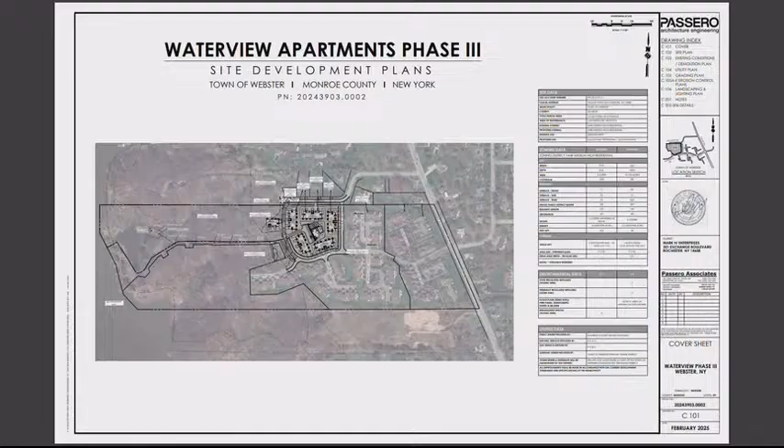You all set? Yep, let's go. Okay. Just get this stuff organized here a little bit.

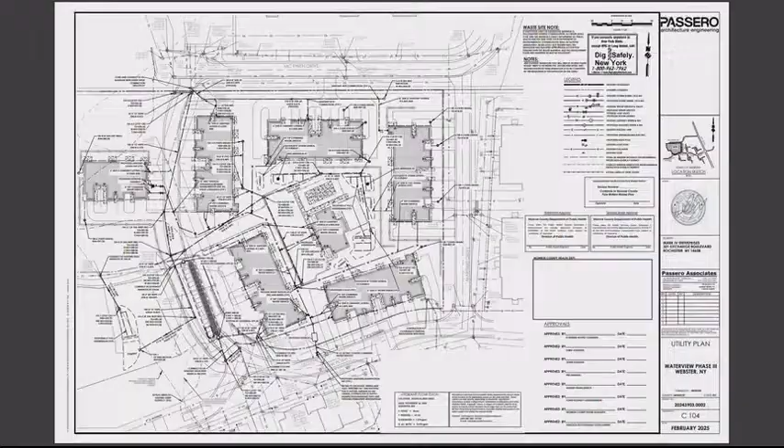I was wondering about the grading on the northwest corner of Building 6, how that transition is happening with all the retaining walls. Can we get clarification on how that's all being tied in on the northwest side? You indicate a retaining wall here, but no additional grading or topo to the northwest of where that retaining wall abuts those contours.

Is there an answer to that? Yeah, they're tying right into existing grade. So whatever the existing grade is, that would be the bottom of the wall elevation. Okay.

I had another comment, if you wouldn't mind evaluating the landscaping plan. It seems you have some prominent tree species that are going to be within your pipe network. Deep roots are going to go right into the drainage structures you've indicated. Just give consideration for long-term success of the drainage structures. In the landscaping plan, there are some larger trees, like PN2 - you have two of them right along the line of your drainage structures. If you wouldn't mind taking a look at that.

This is minuscule, but between building 4 and building 5, you have a garage, so somebody pulling out at night and turning on their lights could potentially shine right into the window of the second story of building 5. If you relocate those trees, keep that in mind to break up the light. You have that scenario in a couple locations, even on the east side between building 4 and 3, and also between building 2 and building 1, where vehicles will be exiting the garage with lights on.

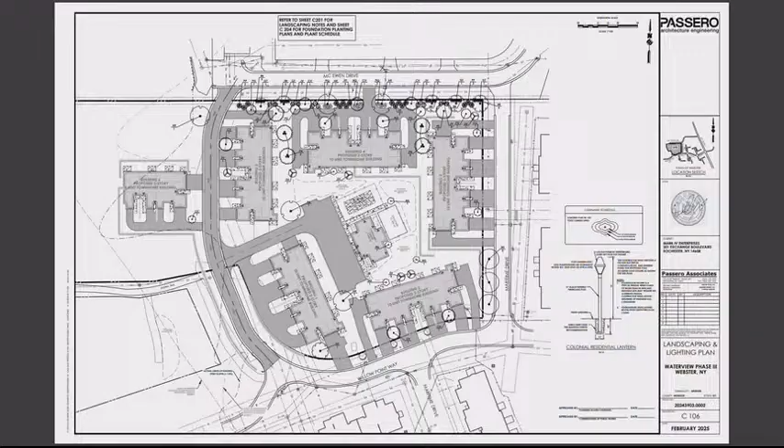One thing to note, you have existing vegetation along Willow Point Way. Is the intention to remove that vegetation or keep the existing trees? All the ones shown are meant to remain. There are, I believe, two that are in the driveway, if you're removing them. If you wouldn't mind indicating how you're going to protect them, because there's some grading occurring there that's more than 6 inches, which could impact them - maybe consider removing them, since it might damage the trees.

There's existing hydrants on Maritime Drive - the silt fence you're proposing is in front of the fire hydrants. If you wouldn't mind moving those behind the fire hydrants so they're not obscuring first responders. I'd also recommend adding silt socks and inlet protections along all the existing structures on Willow Point Way, Maritime Drive, and McEwen Drive. It's easier to clean a silt sock or inlet than to re-flush the entire storm drain later on.

Those are all mine for now. You good, Josh? Okay. You've got all those notes in your head?

Yes. Good. The one with the fence on top of the retaining wall is the only one I think we might have a problem with, because we've got a design going. I don't think it's going to be easy to stop a car with anything, and if a car goes over that, we can pull them out. It's not going to be in good shape, but could we not have that as an absolute condition, and instead explore the possibility of doing that? Sure. Thank you, sir.

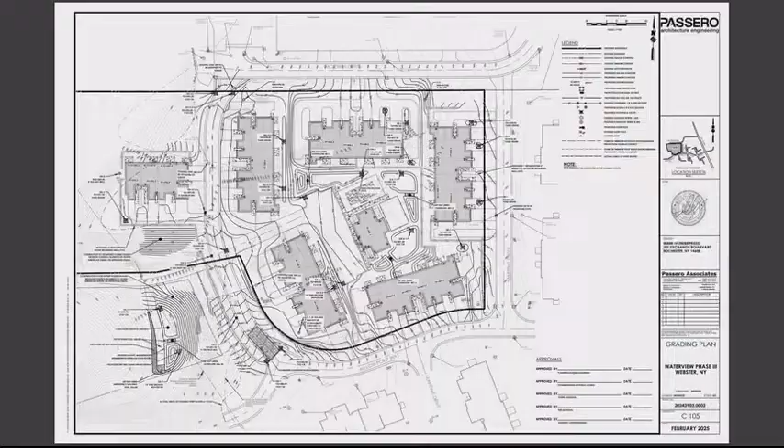So the sand filter that's on the southwest side, there's a road next to it. What's the anticipated rating of that road you're proposing there? Is it HS20? Is a pumper truck going to be able to pull onto that road to maintain potentially that sand filter? I think it was a gravel access path, so trucks or whatever could get down there.

Would you be able to do a vehicle tracker to check if a pumper truck can make it down there? I'm not sure you'd want to take a pumper truck down there, the existing path is somewhat steep. So how is it going to be maintained? Just curious what the maintenance schedule is over time, since it's sand. If they had to get it cleaned out, you'd do it with an excavator. Okay.

Anyone, John, Mark? I know we've been through this thing several times, all the different issues on this. I think one of the biggest things was onto McEwen Drive, and I think you resolved that.

You were putting up some bushes or a berm along there, something to protect neighbors on the other side. That's correct, we enhanced the landscaping. Okay, and I think it's significant that this was a group of neighbors that was really concerned.

And now you had a public hearing that had no comments. I agree there's a lot of engineering detail in this, and that's why the town engineers have been working on this thing for several months now, along with the applicant.

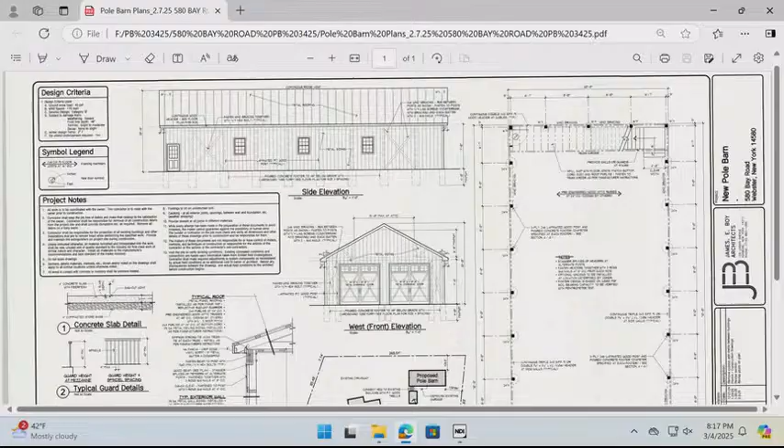What is that stone building you want attached to the pole barn? That was built in 1889. It was a pig house - they stored pigs in it and milk on one side. So that is almost as old as the house, and that will remain there and will be attached.

Is that used for storage now? It's gardening, it's a gardening shed more than anything. It does have a loft in it, so there's not really much you can put in it without climbing up a ladder. It was built in 1889.

Are you going to have electricity, water, or heat out there in this new pole barn? There will not be water. There will be electricity, and at some point we would probably add heating, but it would be like a wall-type unit. But there won't be water or drainage or anything like that - it's not meant to live in it.

Again, this is a public hearing, so if there are any neighbors, anyone wishing to speak in regard to this project? Oh, you already discussed it? I see them for the first time, that's good. That saves us time.

All right, board, any issues or concerns? Are there downspouts discharging on the surface, or are you putting it in like a dry well?

That's a good question, we can certainly do that if that's something needed. I'm just asking because it seems that the barn is moving closer to the east side of the property. There's only 30 feet between the neighbor to the east. I'm not sure what the terrain is doing back there - are you potentially discharging into their yard, or is it more sloped towards the west and not going to discharge into...

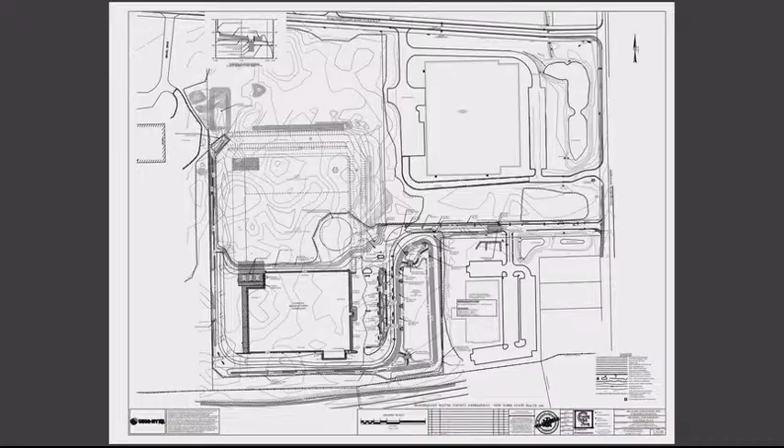Are you going to have, maybe for the water line in the future, sampling tap locations identified? Yeah, we'll coordinate with the Water Authority. I believe the most current plans have the sampling and disinfection taps at the connection, and at the connection to the building, to make sure that's per Water Authority standards.

This would be one of my last questions, or two of the last questions. I noticed the combined system coming towards the proposed manufactured building, then you have a private hydrant, then the combined system continues into the building, which I'm assuming is sprinklered.

Just any concern with there being a hydrant, essentially the first hydrant that the fire department could tap into and draw water from. I think we'll look to make that separation to the domestic, make that T prior to that first hydrant, so that there can't be cross-contamination.

Okay, and then just a quick question on the phasing. The cover letter indicated that the third or final phase would be 2030, but the EAF indicated final phase being 2028. Is it 2028 or 2030? I think it all depends on the market.

I think the way things are going now, it's closer to 2028. And again, we're doing this with intent to get SEQR done for the entire development, do stormwater design for the entire development, not piecemeal it and come back two more times to go through the process, but to design the whole site once. Appreciate it, that's all my questions.

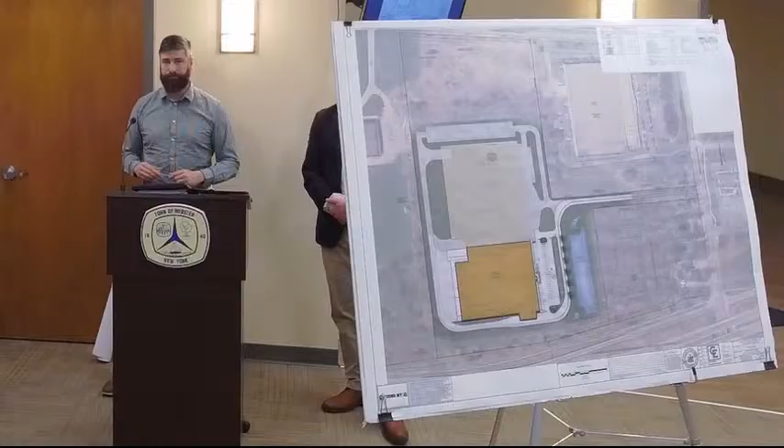Okay, any other questions? There is no approval this evening. Oh, we understand that, yeah, we understand, I know this is just kind of the process.

You need to declare your intent to be lead agency, and get that notification sent out. So with that, we should go ahead.

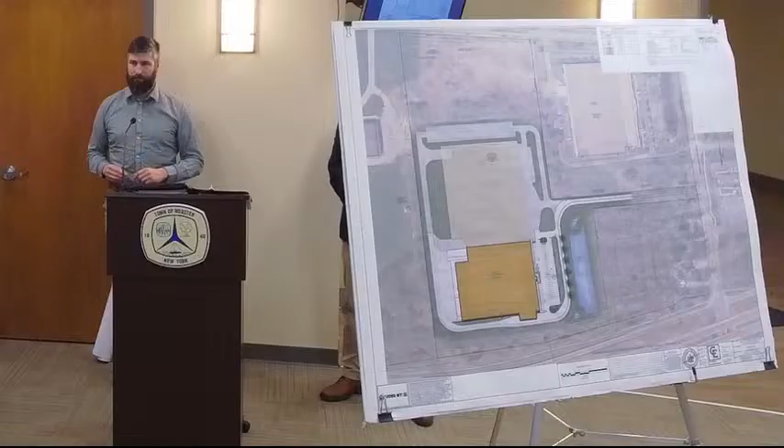This is a public hearing, do we have to open it to the public at all? It's not a public hearing. No, it is. It says in the agenda. It does? Yes. Oh, you're right, it does. I didn't even see that.

Okay, if anyone wishing to comment on this, we'll open it, but there's no vote being taken. No one wishing to speak? Okay, we'll close the public hearing for this evening, but we won't close it entirely since you're gonna be coming back. We'll leave it open, we'll just close it for this evening, that's it.

Go ahead. Whereas the Town of Webster Planning Board considered the request by applicant Matt McAlpin of McAlpin Industries to construct a multi-phase development totaling 300,000 square feet of light industrial manufacturing on a 25.65 acre parcel having SBL number 079.06-1-32.123, located in an OP Core Area North Office Park District.

Now therefore be it resolved that the planning board determine that the action is a Type 1 action based on the following criteria. Number 1, 617.4 B6-1, a project that involves the alteration of more than 10 acres of land. And number 2, 617.4 B6-5, it's in a city or village having a population of 150,000 people or less, with a facility having more than 100,000 square feet of gross floor area.

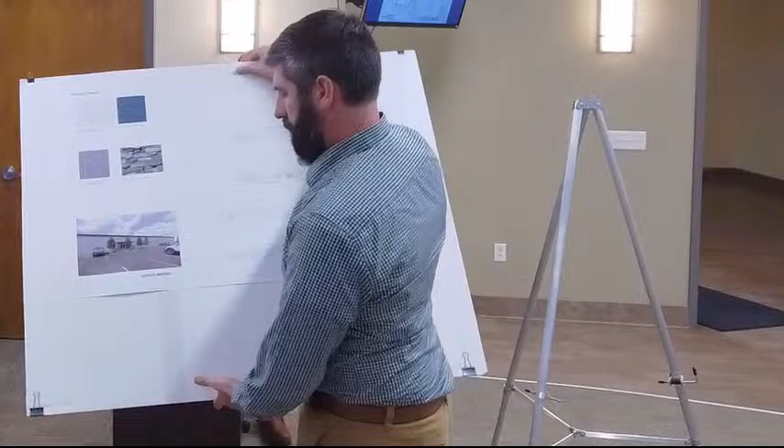Why not make that the whole focal point? It's not the long-term focal point. Phase 2 would have more of an administrative office in the front with a front lobby, and that would have more of a focal point visible going down the access road. The front entrance shown on the sketch plan right now is not visible from the road.

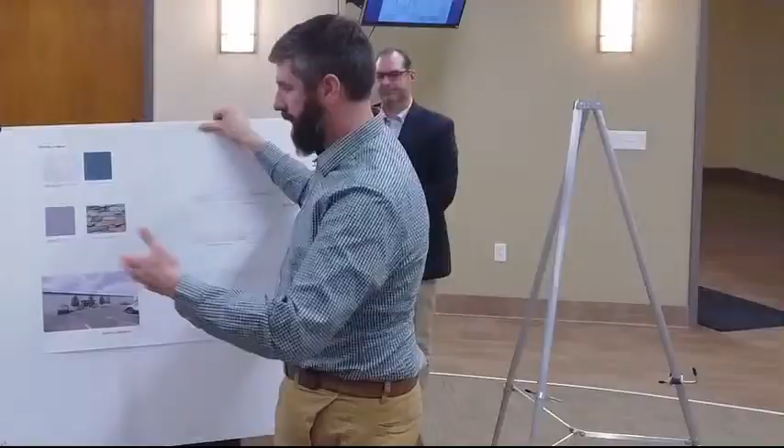So we want that to look nice, at least attract visitors to that entrance point compared to the rest. This is one of the requirements we look for, it's in the guidelines, and we can look to expand upon what we've done to make it more, what we can.

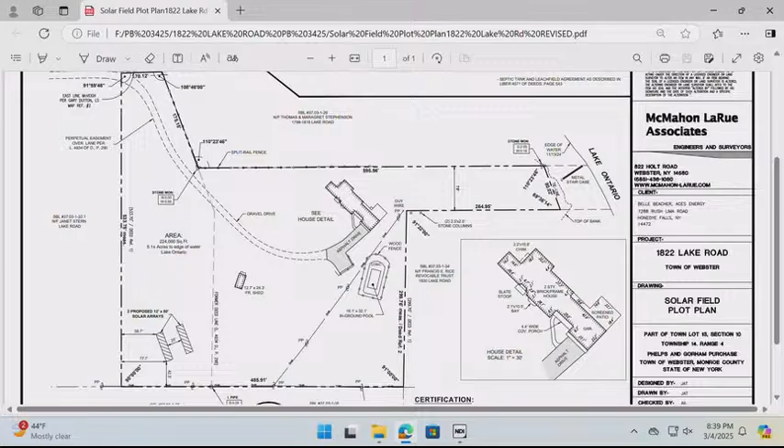Now, what's that former deed line? So that's all one parcel though, right? Yeah. In ground pool, I don't see any big issue with it. It was approved before, you're just modifying it, changing the location? Correct, it's still not visible from the road, hundreds and hundreds of feet back, half a mile away.

Are the Lochner family and the Stern family aware of the panels going where they're being proposed? The Sterns are the owners. Lochner is the one on the south side. Yeah, we sent letters out as part of the previous application. How close is their residence? Is it inside of potential glare? It's nowhere close to any structures, no.

Okay, this again is a preliminary approval. If there's anybody here to discuss it, I don't think anyone's here, I'll move on with it. Public hearing. We have to do that too, don't we? I just asked if there was anyone. I did, oh I'm sorry, I did.

Should we redo the SEQR on it, or does the other one still exist? I think the other one still exists because it's still probably adequate, right? Would you agree? Yep. Okay, then if that's the case, we'll move forward with the approval.

So, want to make a motion for the approval of the solar panel, sir? I'll make a motion that we approve the proposed solar PV located at 1822 Lake Road and make that as presented. One second, we need to add a condition because it will require them to go back to the zoning board for the proximity to the front lot line.

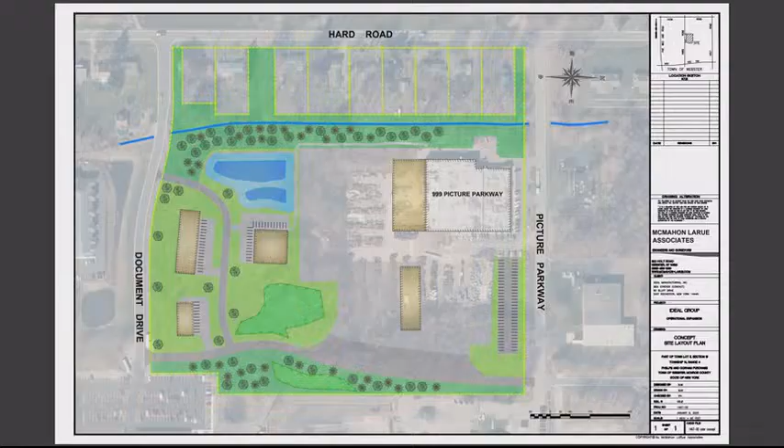As I'm looking at this, the people that are affected, the other families - we're just like 12 families, but just because I'm the only one here doesn't mean I'm the only one that cares. I met some of my neighbors for the first time. They were in the back but couldn't stay up this late - 810 Hard Road - and I spoke with my neighbors at 818 Hard Road before coming. We did positively receive the owner when he came by, and he showed us some version of this. He was very cordial, but he also kind of made it seem like this was a very distant thing, may or may not happen kind of a thing.

So now that people have had time to think about it, some of the things we're concerned about - what I'm really concerned about is there are a lot of young children in these houses now. I've been a homeowner there for 5 years, and in that time the houses around me have turned over, and a lot of young families, growing families, a lot of children under the age of 10 live there. I have 4 children under 10 myself.

The traffic in the morning - I know you're going to do traffic studies and stuff like that, but we just added the medical building off Hard Road. There was the other project we heard about earlier today, now this, with I'm assuming increased trucks eventually. It's already a nightmare in the morning. I've been in an accident on the way out of my driveway just because of the school traffic. There's the buses coming out and in multiple times a day.

It's not just the schools across the street - all the buses that go to Klem South and Klem North go by there too. My children's school bus has been in an accident out there. There's just a lot of traffic already, and I worry about the kids walking, playing in the yard, if there's going to be a lot more big trucks.